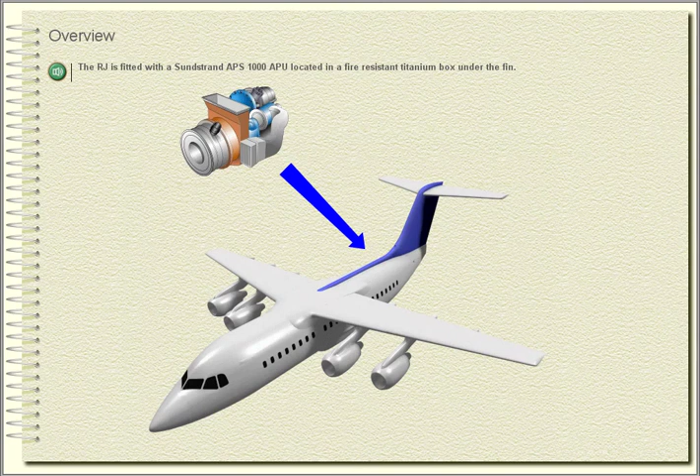The APU supplies electrical power via an AC generator to Channel 1 and Channel 2. Channel 1 has priority in the air. The APU is also used to supply air for flight and ground use, usually for air conditioning, particularly on takeoff and landing, to allow the engines to produce maximum power if required.

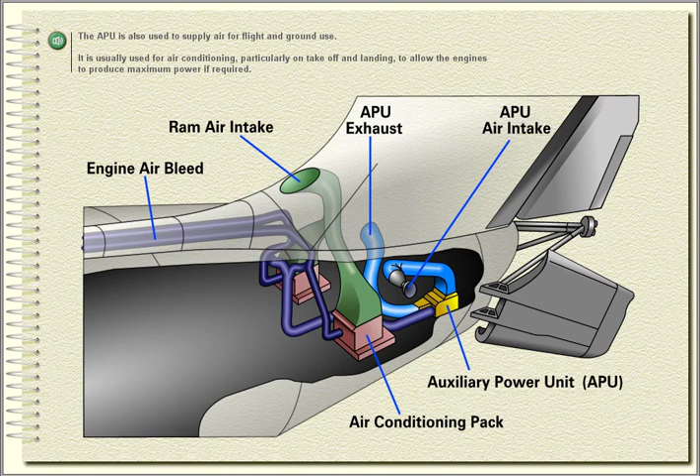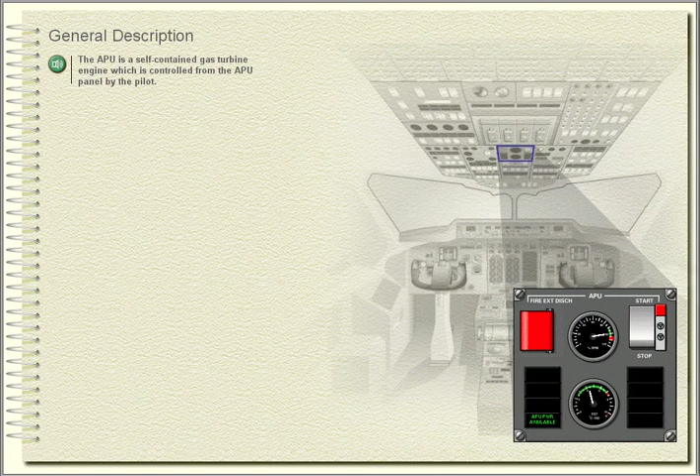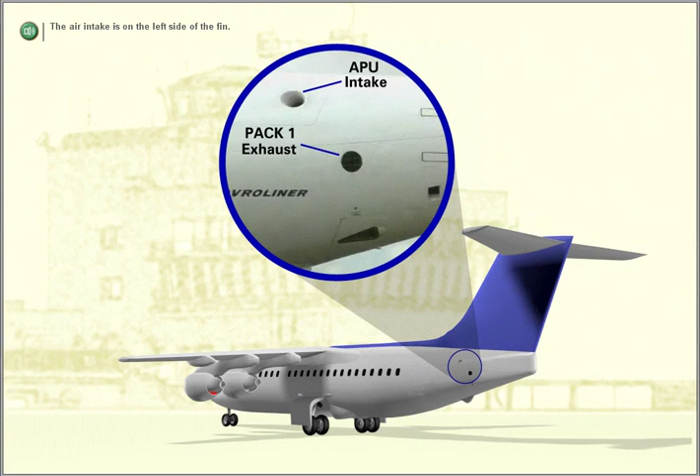General description. The APU is a self-contained gas turbine engine which is controlled from the APU panel by the pilot. Access for maintenance and servicing is through a large door under the unit. The air intake is on the left side of the fin. The exhaust is on the right to avoid ingestion of exhaust gases.

Fuel for the APU is drawn from the left inner feed tank. The APU will start normally using suction feed. The left inner fuel pump is used when AC electrics are available.

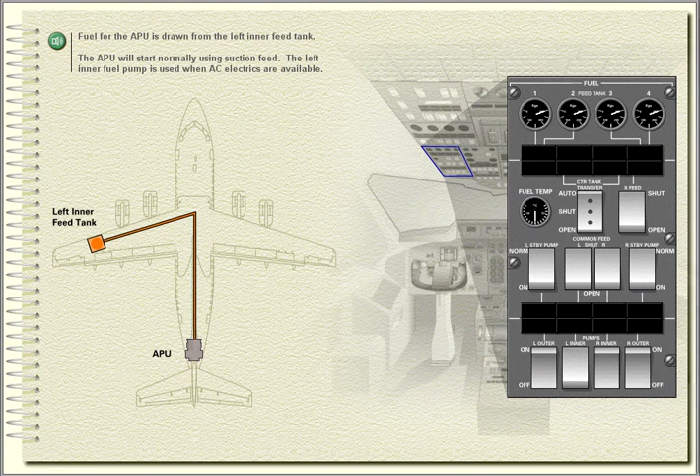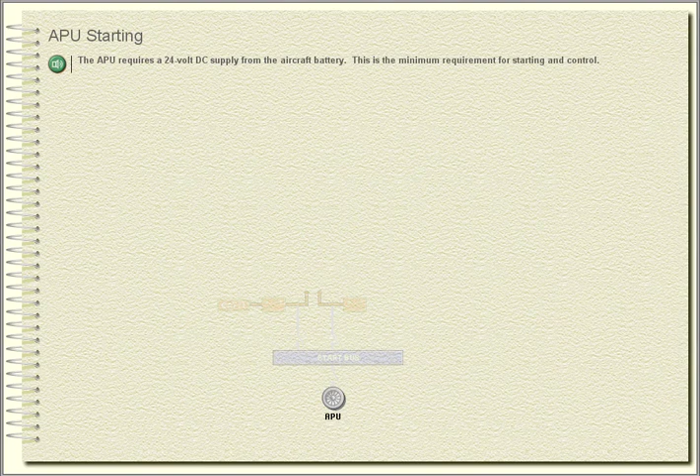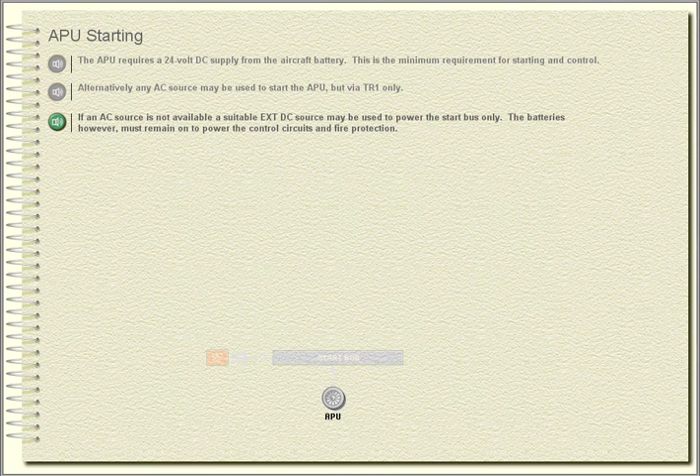APU starting. The APU requires a 24-volt DC supply from the aircraft battery. This is the minimum requirement for starting and control. Alternatively, any AC source may be used to start the APU, but via TR1 only. If an AC source is not available, a suitable external DC source may be used to power the start bus only. The batteries, however, must remain on to power the control circuits and fire protection.

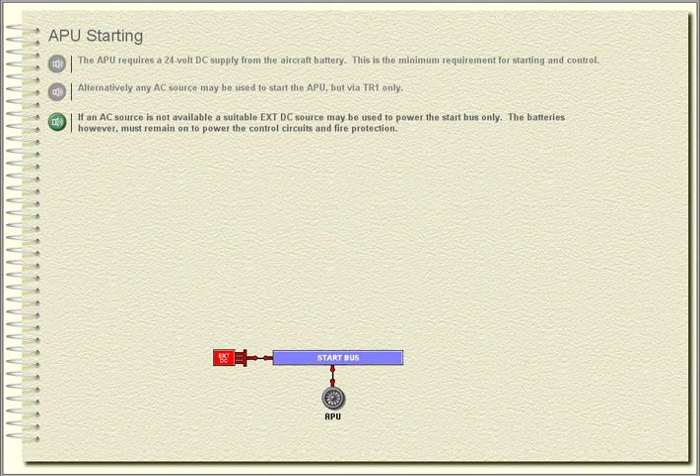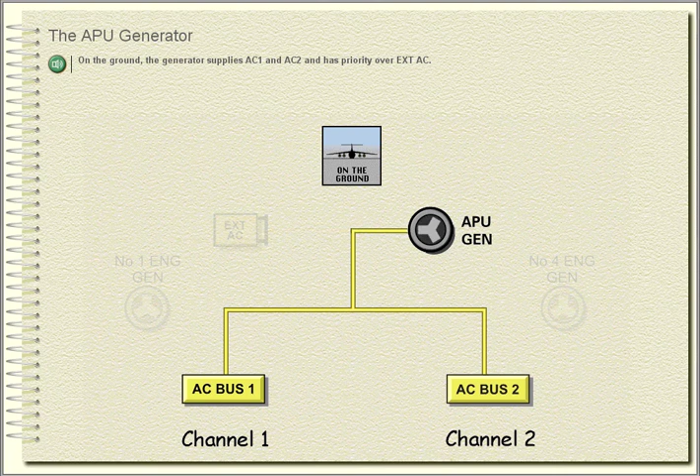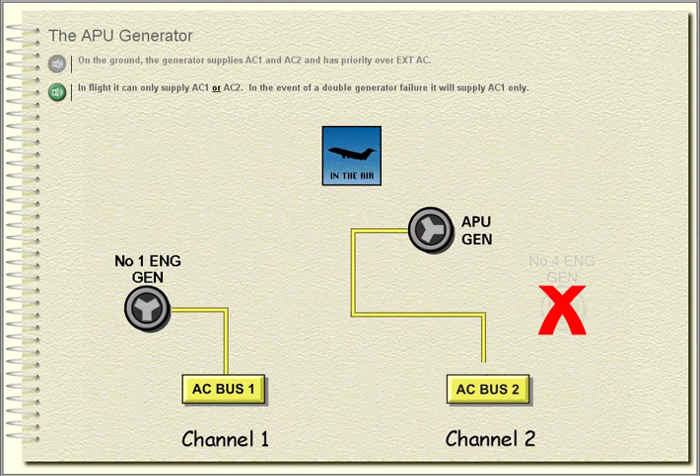The APU generator. On the ground, the generator supplies AC1 and AC2 and has priority over external AC. In flight, it can only supply AC1 or AC2. In the event of a double generator failure, it will supply AC1 only.

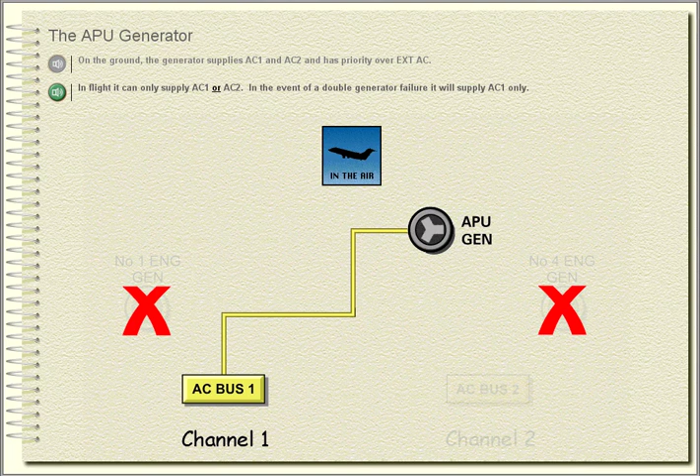APU air. Air is supplied via the APU air valve for air conditioning, the primary use, and other services which are covered in the air supplies module. If the APU generator is used to start engines, APU air must be off. This is to prevent the APU shutting itself down due to over-temperature.

APU auto shutdown. The APU is protected both on the ground and in the air by a series of auto shutdown features. Additionally, an APU fire will shut the APU down on the ground only. This feature permits the flight deck to be left unattended for short periods on the ground. If the fire warning comes on in flight, the APU would remain running until shut down by the crew.

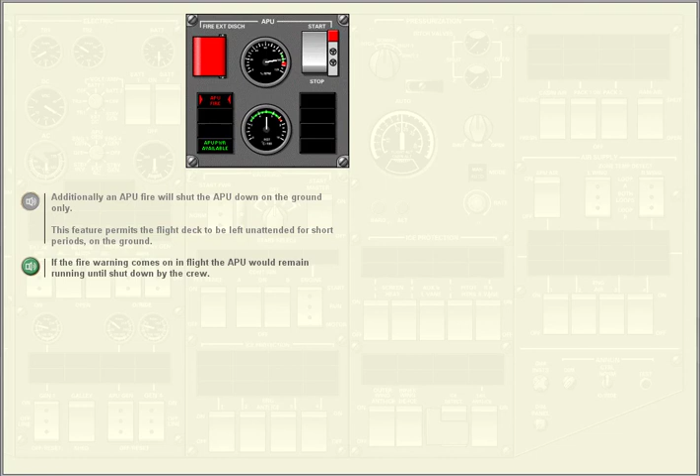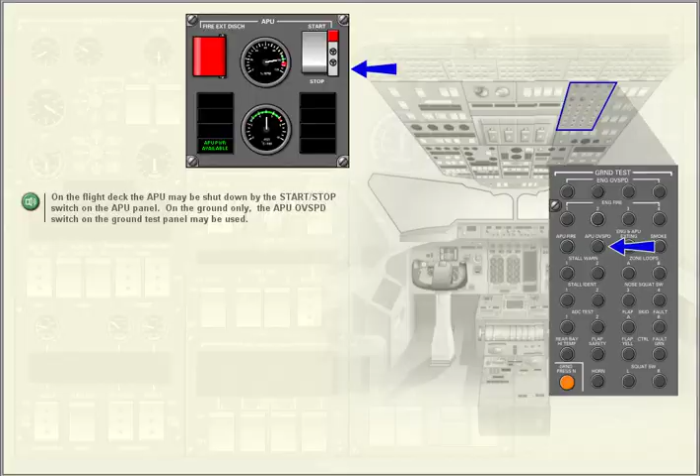On the flight deck, the APU may be shut down by the Start-Stop switch on the APU panel. On the ground only, the APU over-speed switch on the ground test panel may be used. Alternatively, when the aircraft is on the ground, one of two emergency shutdown switches can be used to shut the APU down. These emergency switches are located in the air conditioning bay and next to the refuel panel.

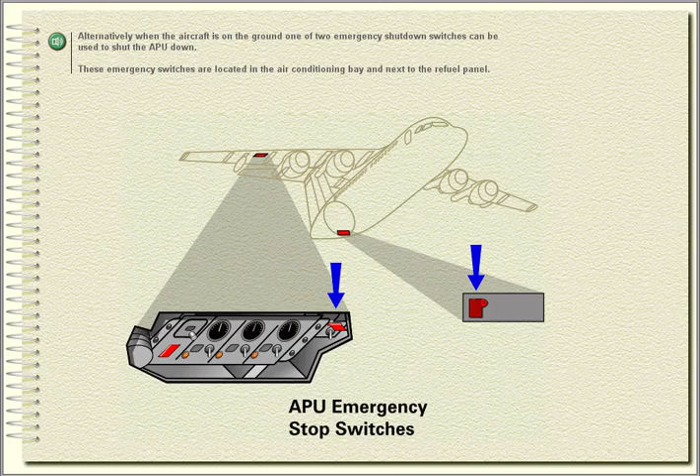If one of the external emergency switches is used, the next action must be to go to the flight deck and place the Start-Stop switch to stop. This is to prevent the APU automatically restarting the next time power is applied to the aircraft. There is also a customer option that will sound an external horn until the APU switch is placed to stop.

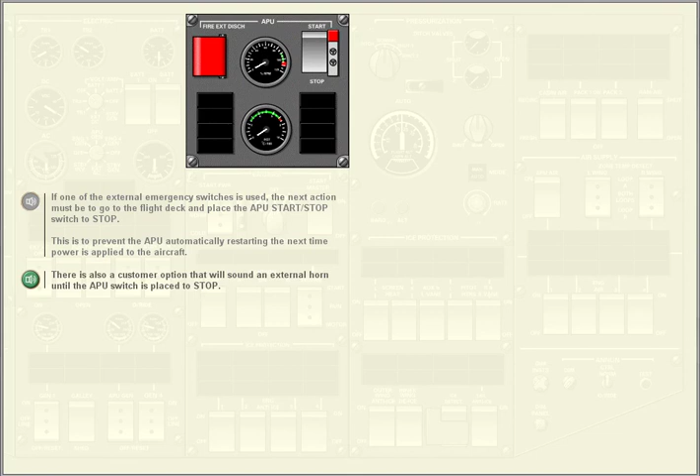You should now have an understanding of the features of the APU. The next lesson takes you through external checks.

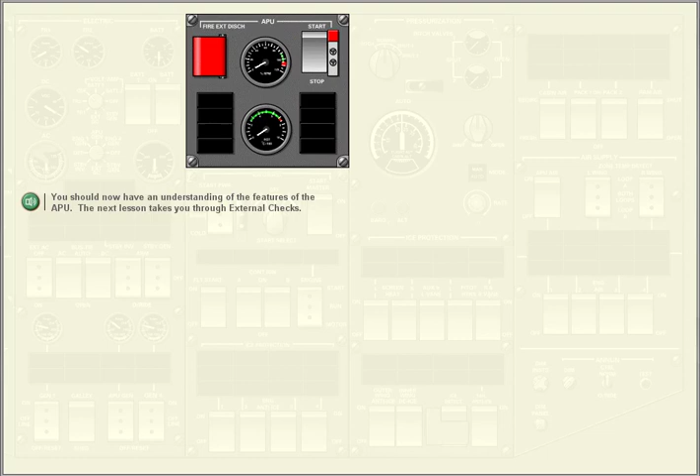External checks. On completion of this section, you will be able to carry out the external checks associated with the APU and be able to identify problems which require further investigation.

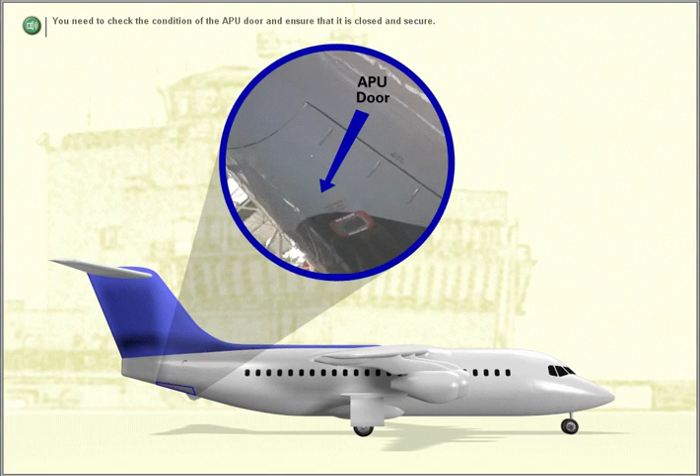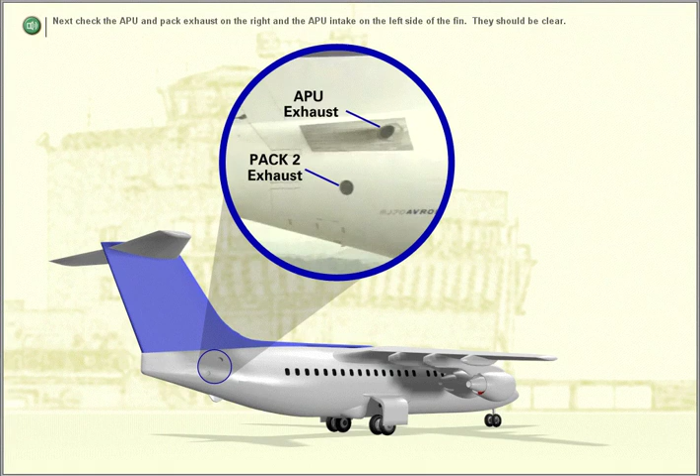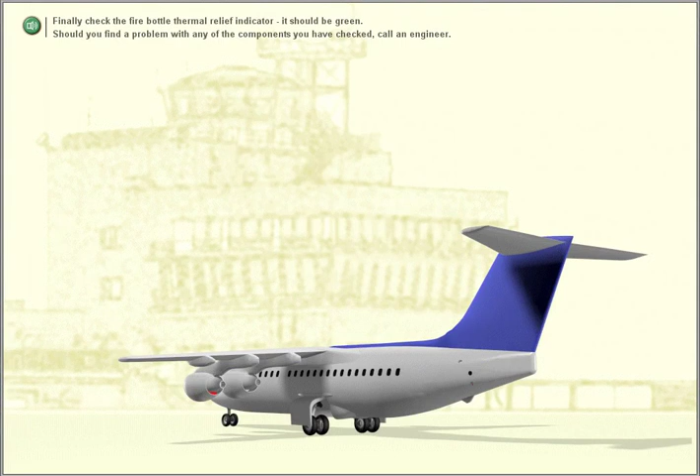You need to check the condition of the APU door and ensure that it is closed and secure. Next, check the APU and pack exhaust on the right and the APU intake on the left side of the fin. They should be clear. Finally, check the fire bottle thermal relief indicator. It should be green.

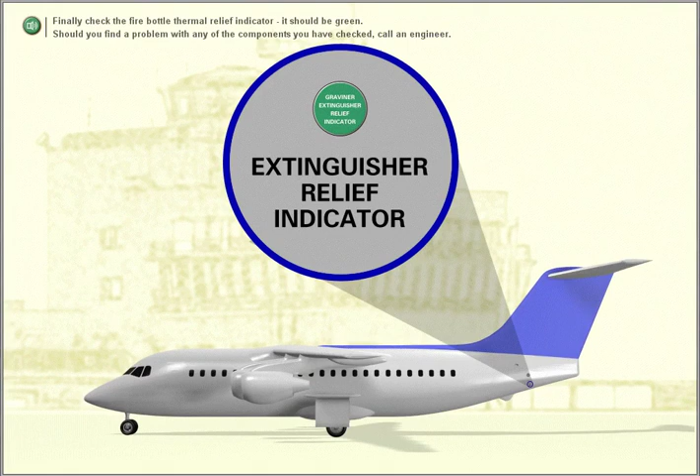Should you find a problem with any of the components you have checked, call an engineer. That completes the external checks. The next lesson takes you through the normal operating procedures before, during and after flight.

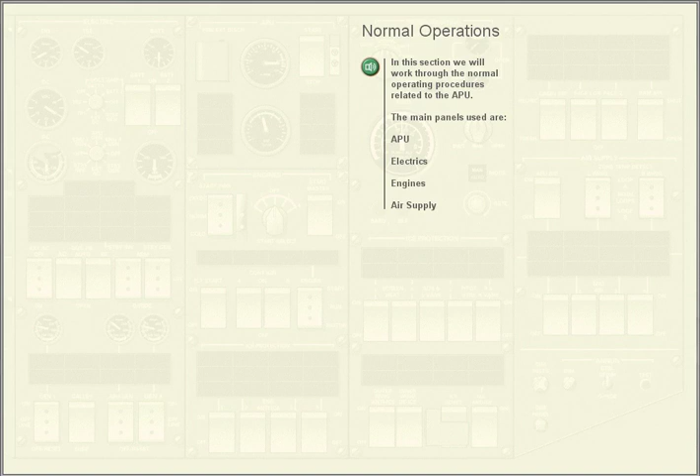Normal operations. In this section, we will work through the normal operating procedures related to the APU. The main panels used are APU, electrics, engines and air supply.

Pre-flight checks. Check that the APU generator is in the on position. When the APU is started and APU power is available, the APU generator will automatically power the aircraft busbars.

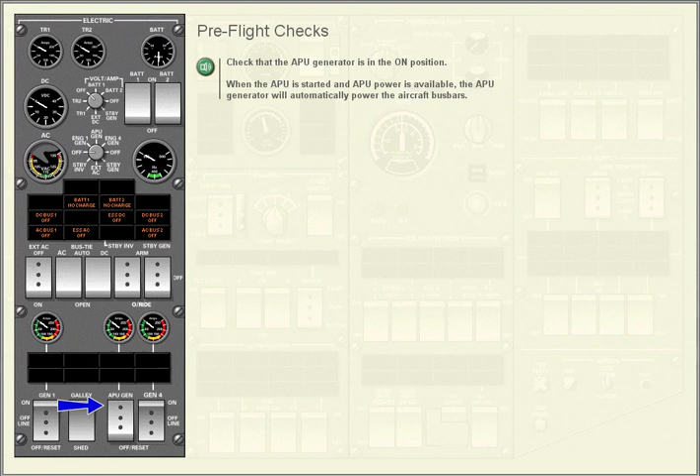The integrity of the fire detection system must be checked by pressing the APU Fire Test button on the overhead ground test panel. This test must be carried out before the APU is started. If the APU is running when this test is carried out, it will shut down.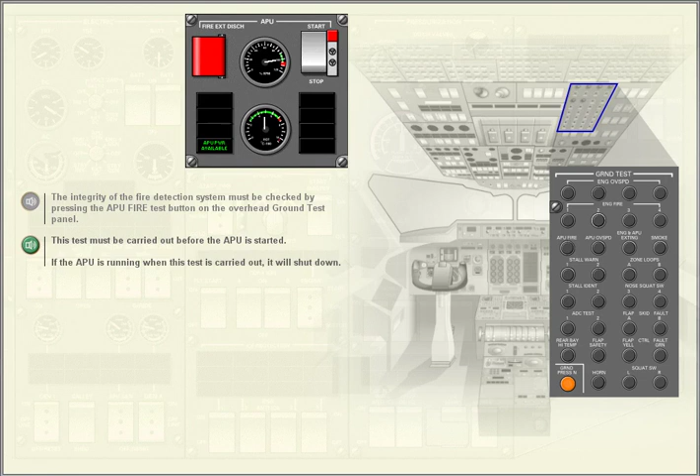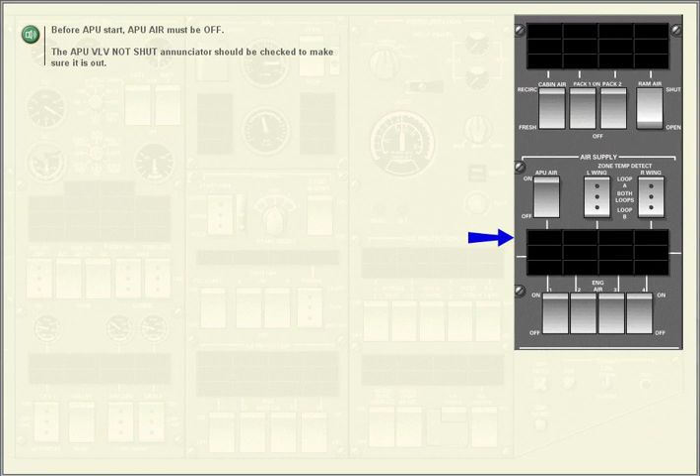Before APU start, APU air must be off. The APU valve not shut annunciator should be checked to make sure it is out. On the fuel panel, the left inner fuel pump is selected on.

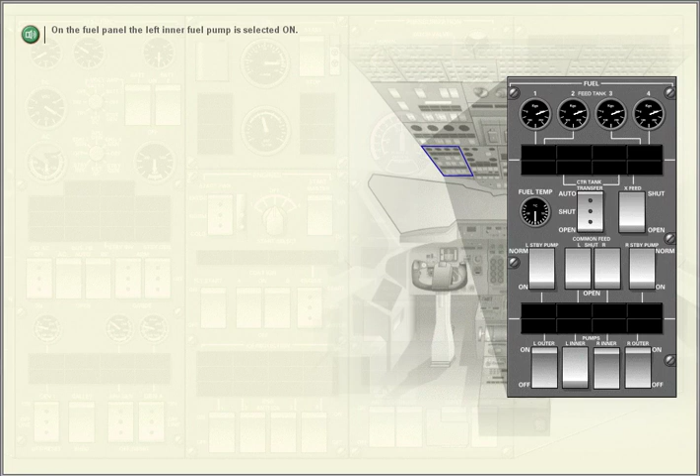The guard on the APU Start-Stop switch is released and the start position selected. The Start Power On annunciator on the engines panel will light. The APU fuel valve annunciator on the APU panel will also light briefly as the fuel valve opens.

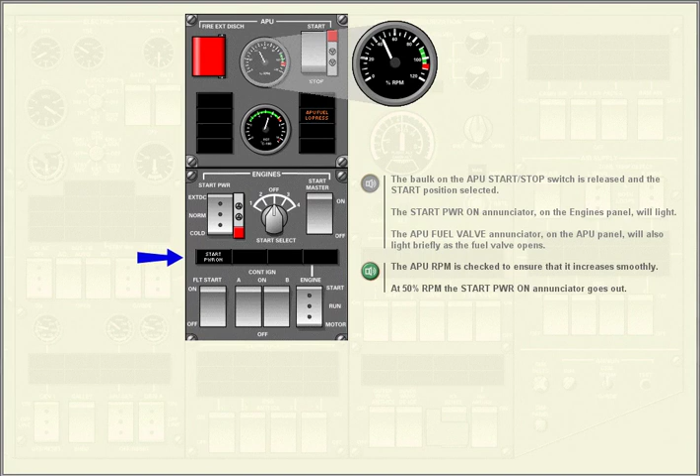The APU RPM is checked to ensure that it increases smoothly. At 50% RPM, the Start Power On annunciator goes out. As the APU accelerates, the EGT gauge is checked to ensure that the start limitation of 1032 degrees Celsius is not exceeded.

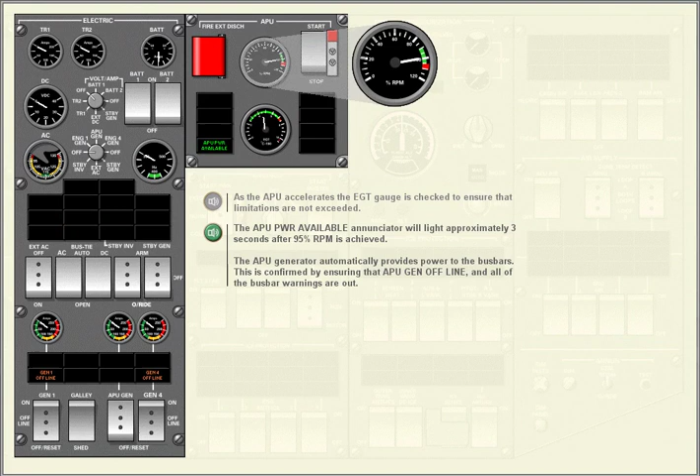The APU Power Available annunciator will light approximately 3 seconds after 95% RPM is achieved. The APU generator automatically provides power to the busbars. This is confirmed by ensuring that APU generator offline and all of the busbar warnings are out.

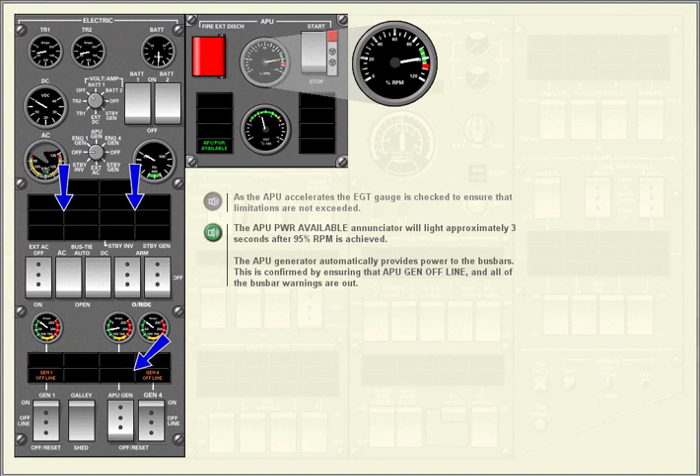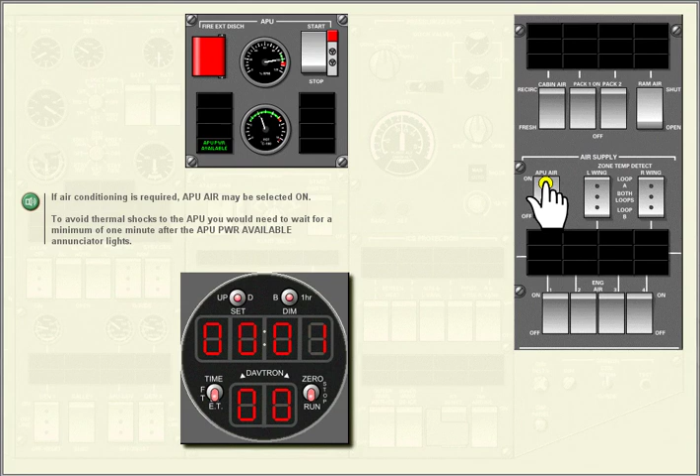If air conditioning is required, APU air may be selected on. To avoid thermal shocks to the APU, you would need to wait for a minimum of 1 minute after the APU Power Available annunciator lights. The APU air and both packs must be selected off when using the APU generator to start the engines.

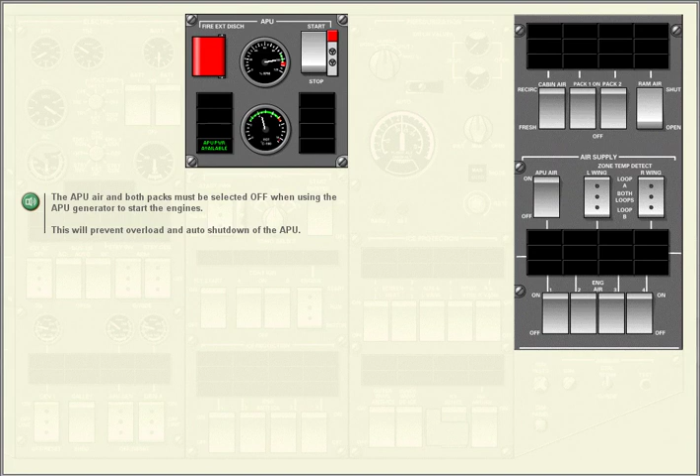This will prevent overload and auto shutdown of the APU. When external AC is used to start the engines, the APU generator must be set to off reset, so that only one power supply is connected to the aircraft.

The APU air and packs may be left on. Although the APU is supplying both packs in fresh mode, it is normal to operate with a single pack in recirculation mode whenever possible. This reduces load on the APU and helps to prevent mist from the air conditioning vents in very humid conditions.

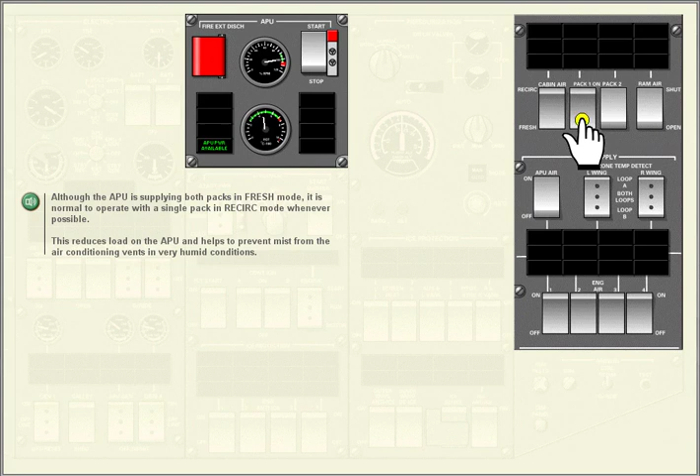That completes the pre-flight checks for the APU.

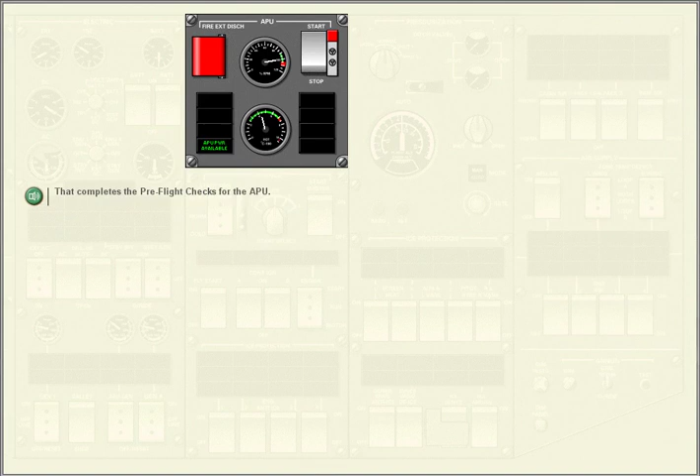Now it is your turn to complete the 5 pre-flight checks by working through the instructions on the following pages.

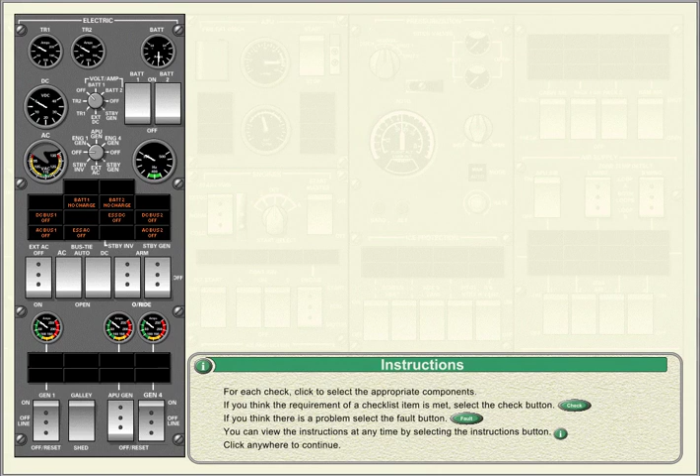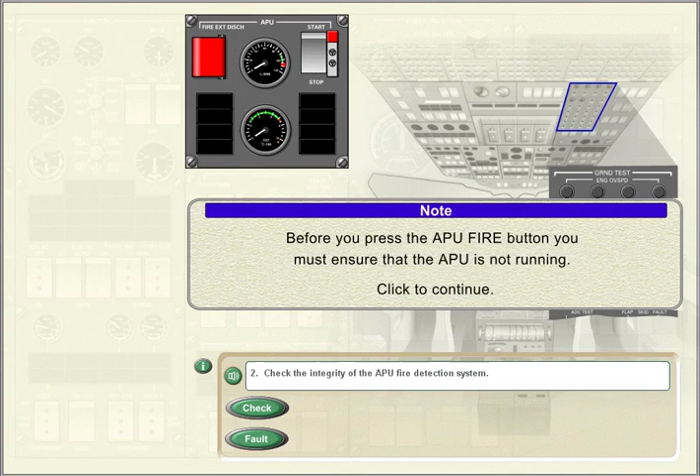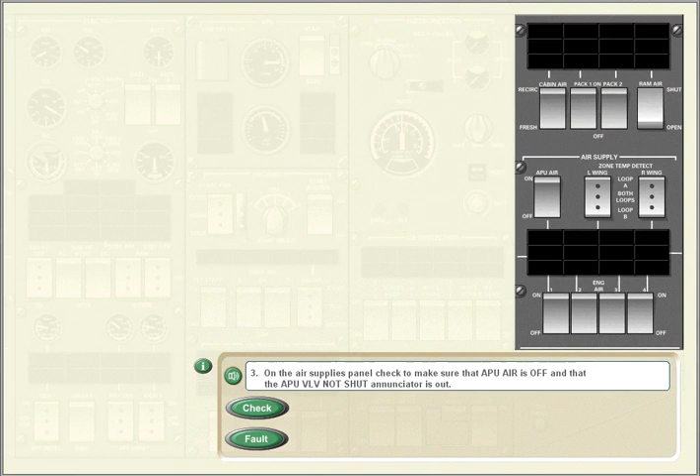On the electrics panel, check the APU generator is on. Check the integrity of the APU fire detection system. On the air supplies panel, check to make sure that APU air is off and that the APU valve not shut annunciator is out. Start the APU and check all indications are normal.

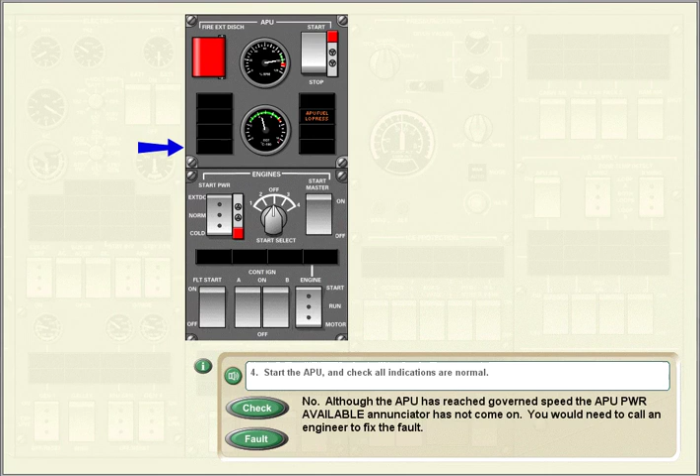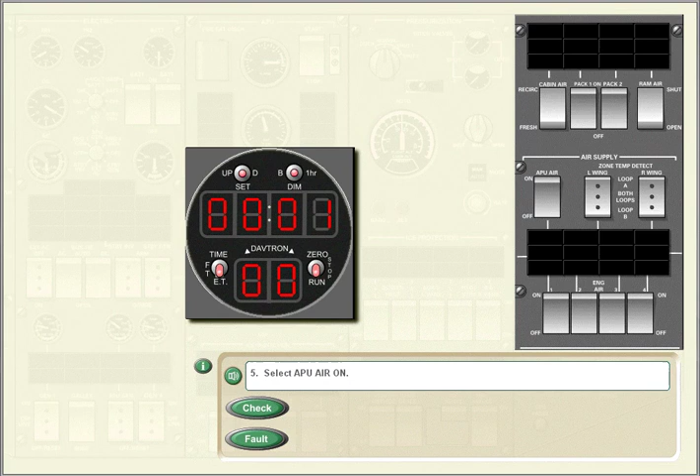You have now completed the pre-flight checks for the APU. The next section will deal with the checks you would need to perform in flight.

In the air, after takeoff, all engine airs are selected on and the APU air is selected off. A check is made to ensure that the APU valve not shut and APU non-return valve leak annunciators are out.

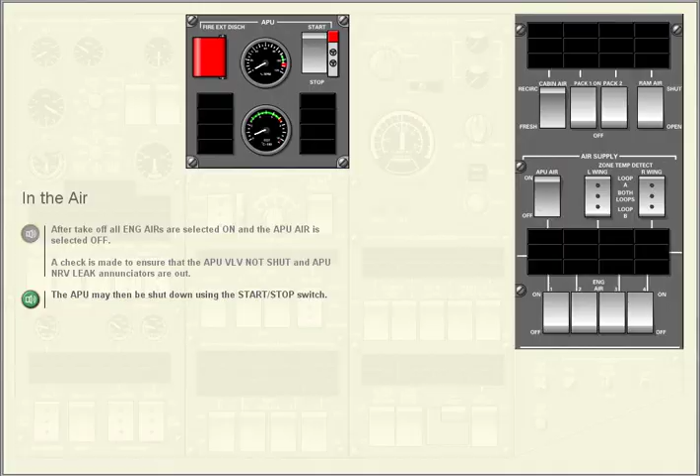The APU may then be shut down using the Start-Stop switch. If APU air is not required for landing, the APU need not be started.

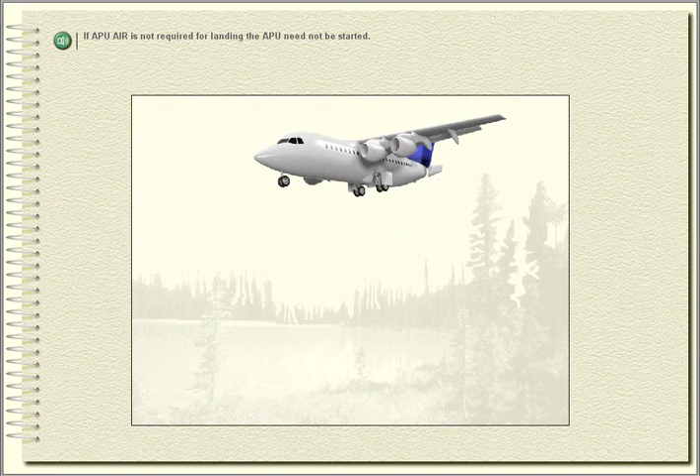That completes the in-flight checks for the APU. Now it is your turn to complete the 4 in-flight checks by working through the instructions on the following pages.

Switch all engine airs to on. Switch APU air to off. Check that the APU valve not shut and APU non-return valve leak annunciators remain out. Switch the APU Start-Stop switch to stop.

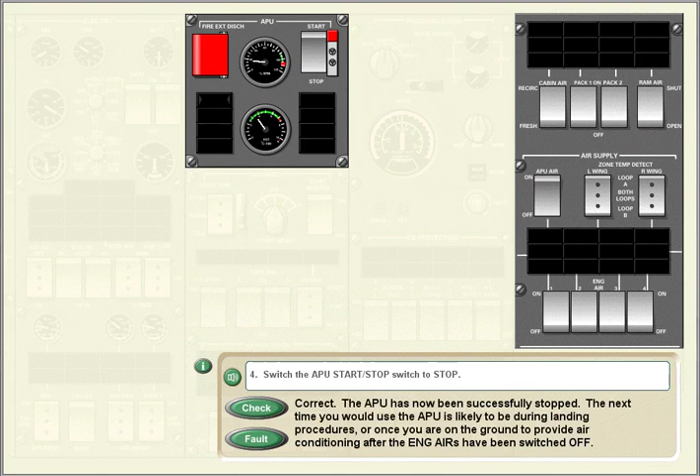You have now completed the in-flight checks for the APU. The last section of normal operations takes you through the post-flight checks.

Now it is your turn to complete the 4 in-flight checks by working through the instructions on the following pages.

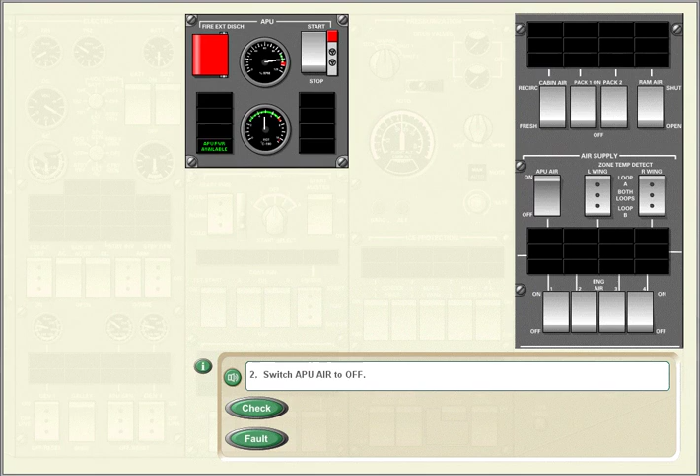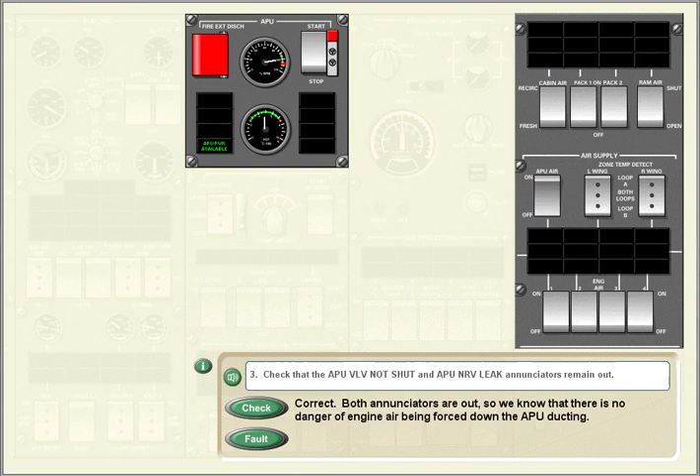Switch all engine airs to on. Switch APU air to off. Check that the APU valve not shut and APU non-return valve leak annunciators remain out. Switch the APU Start-Stop switch to stop.

You have now completed the in-flight checks for the APU. The last section of normal operations takes you through the post-flight checks.

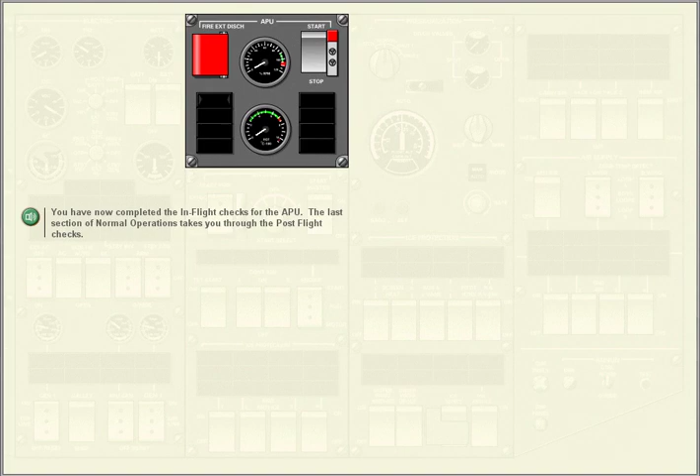Post-flight. If the APU was not started in the air, it may be started after landing to provide air conditioning.

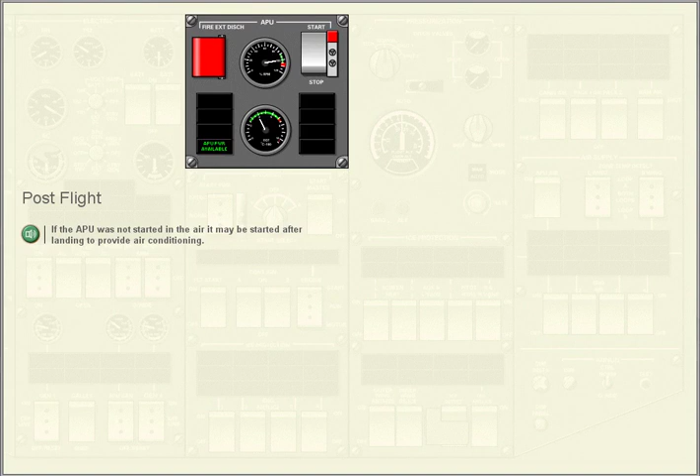When the APU is no longer required, APU air and the packs are switched off.

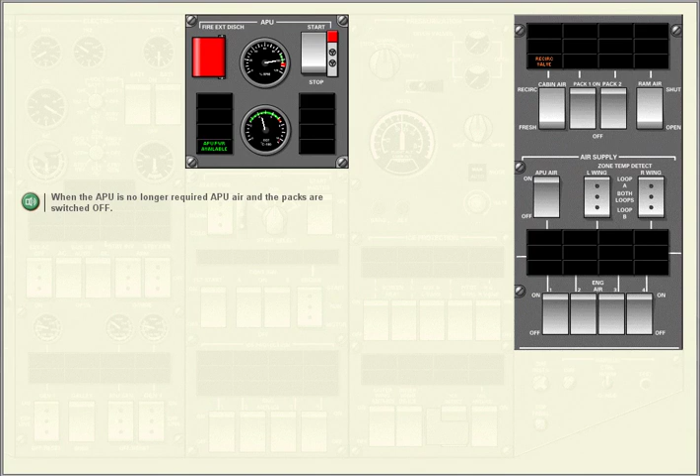The normal method of stopping the APU on the ground is by testing the APU overspeed circuits by pressing the APU overspeed button on the overhead ground test panel. This confirms that the APU overspeed protection circuit is working.

After checking to ensure the RPM and EGT are reducing, the APU Start-Stop switch is selected to stop. Finally, the left inner fuel pump is selected off.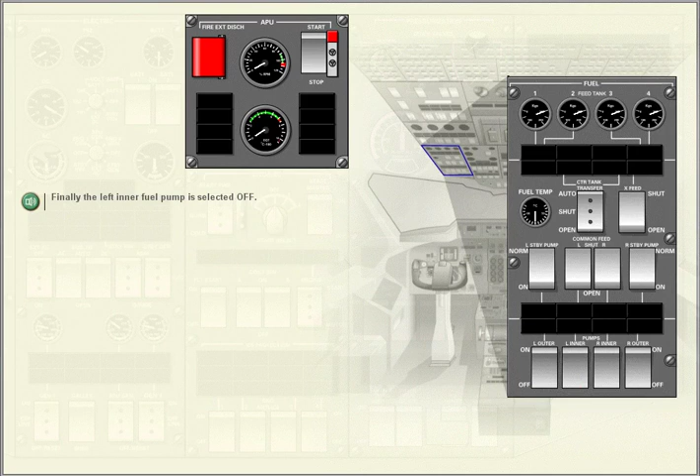That now completes the lesson on normal operations. The next lesson takes you through abnormal operation procedures for the APU.

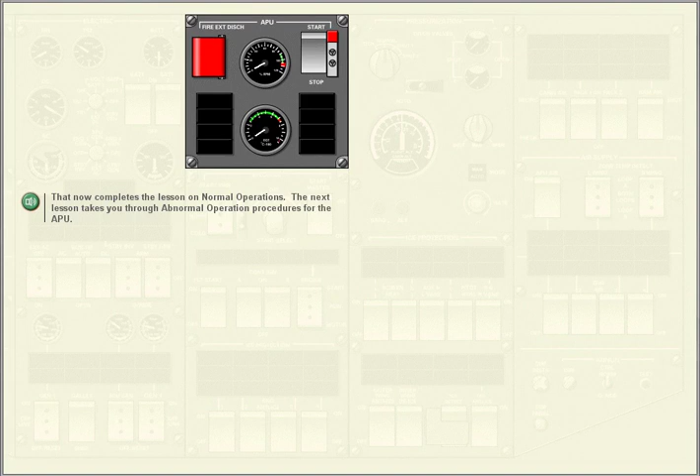Abnormal operations. On completion of this section, you should be able to understand the most likely causes of problems which affect the APU and be aware of the reasons which lie behind abnormal checklist actions.

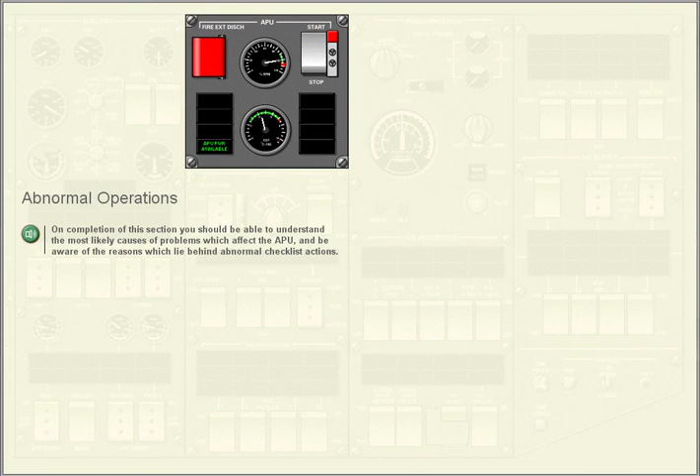Non-return valve leak. If a non-return valve leak occurs, it could mean that the APU is in danger of having engine bleed air forced down the APU ducting against the flow. This could cause the APU to surge and possibly cause damage.

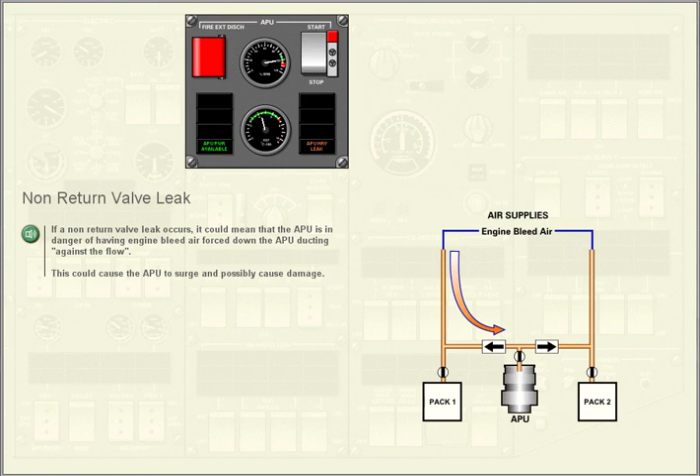The APU air must not be used whilst the annunciator is lit. The APU generator may be used without restriction. Should the non-return valve leak annunciator subsequently extinguish, APU air can be used again.

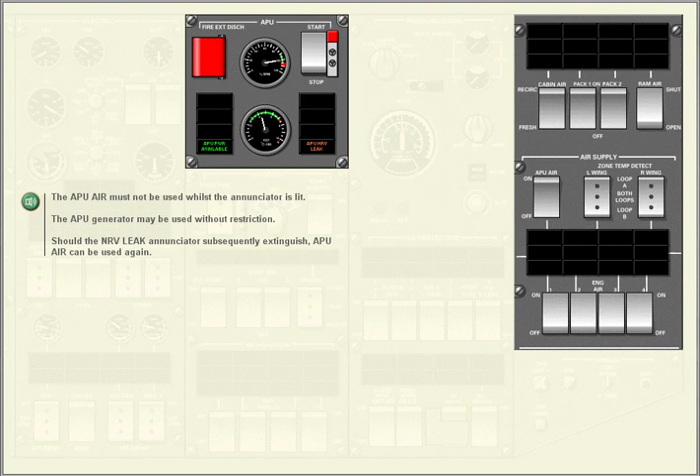APU auto shutdown. The APU will automatically shut down to protect against damage following certain malfunctions. These apply equally to malfunctions on the ground or in flight, with one exception. What is the exception?

These malfunctions are signalled by illumination of the auto shutdown annunciator on the control panel. The only action required of the crew is to place the APU start-stop switch to stop and the APU air switch to off. The APU must not be restarted.

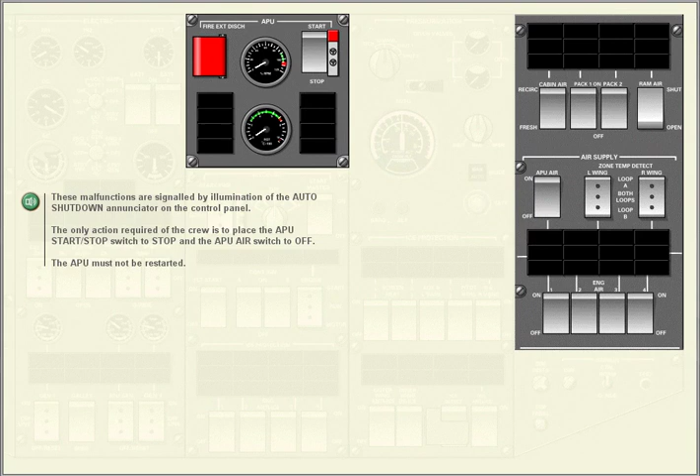That now completes the lesson on abnormal operations. The next lesson presents details of limitations affecting the APU.

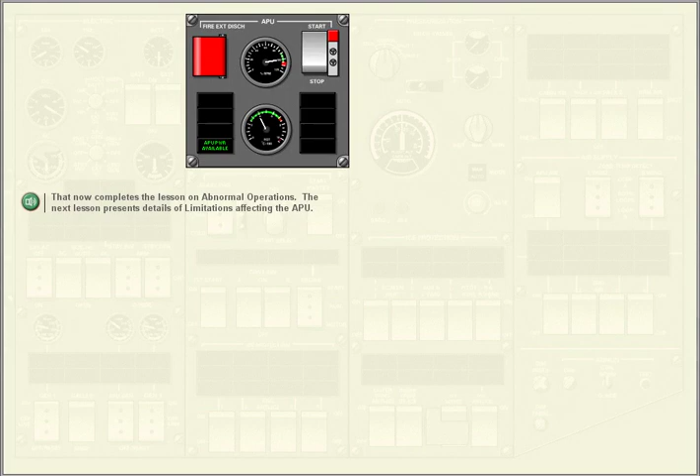Limitations. The APU starting envelope is 0 to 20,000 feet. If the APU is required in an emergency, a start can be attempted above this altitude, but may not be successful.

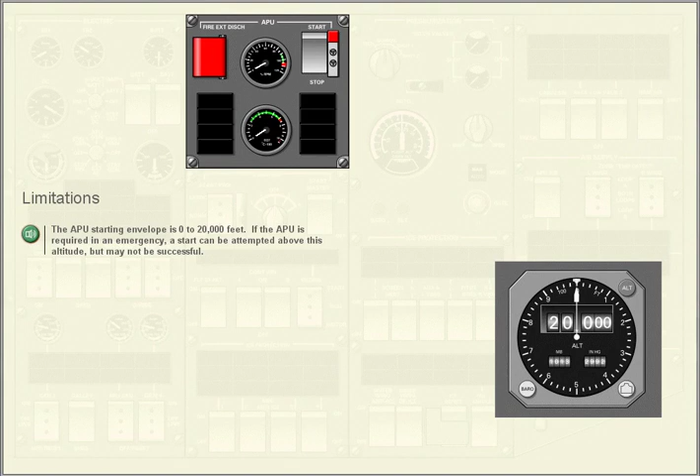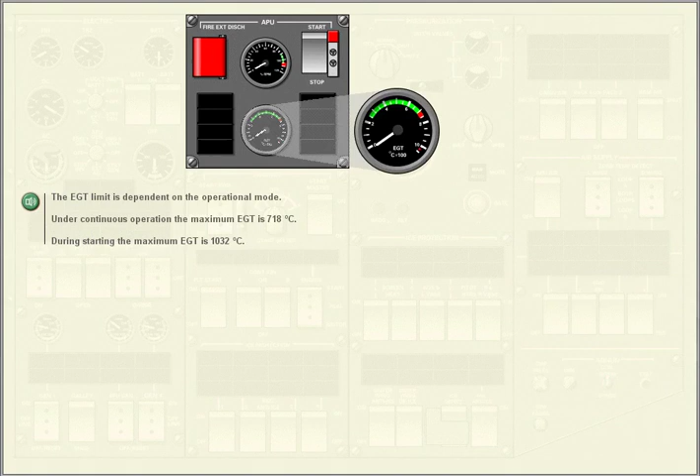The EGT limit is dependent on the operational mode. Under continuous operation, the maximum EGT is 718 degrees Celsius. During starting, the maximum EGT is 1032 degrees Celsius.

If the APU generator is used for engine start, what must we ensure?

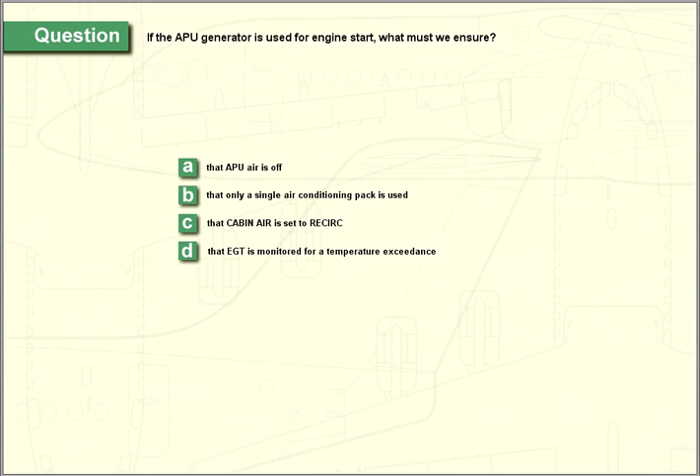The APU has a maximum speed limitation of 106.5%. An overspeed shutdown will occur above this speed.

Attempts to start the APU should be limited to a maximum of 3 start attempts at 1-minute intervals, ending with a 5-minute cooling period. 3 further attempts may be made, and then the entire cycle can only be repeated after 30 minutes.

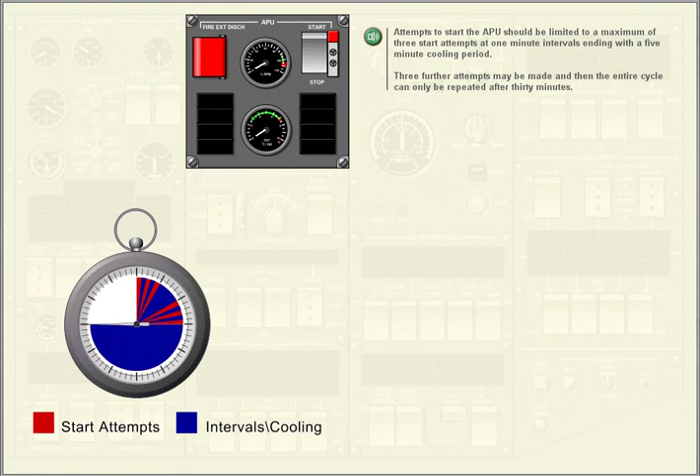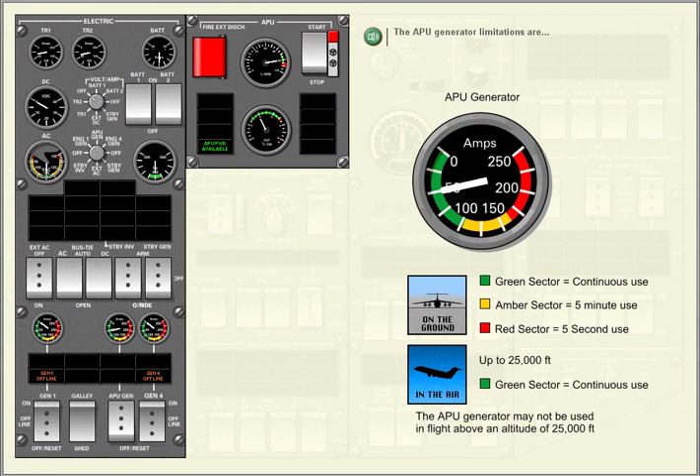The APU generator limitations are: additionally, APU air can be supplied up to a maximum altitude of 15,000 feet.

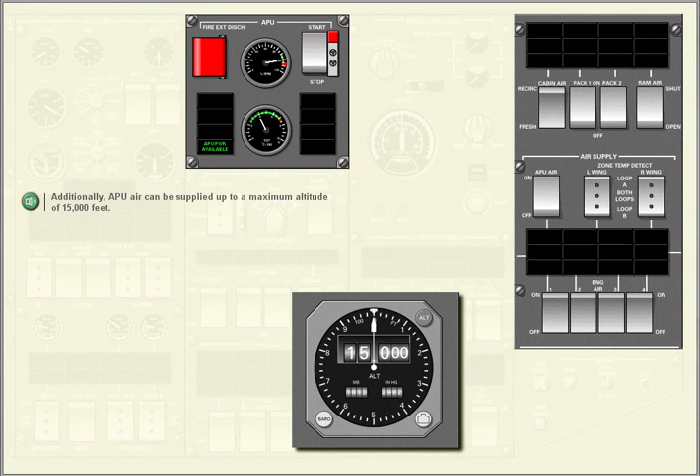That completes the APU module. Now try the module test.